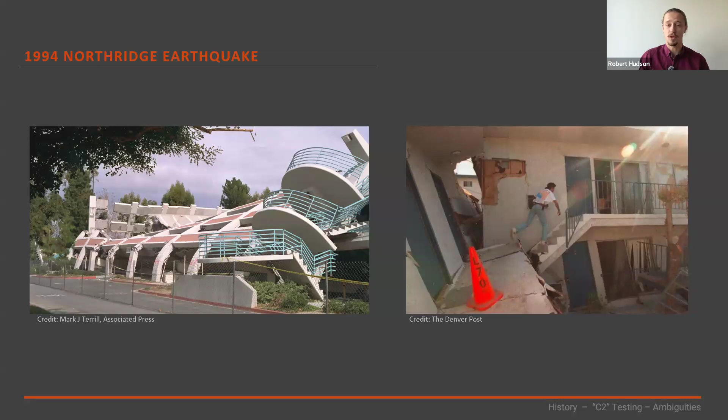So much so that the US actually banned post-installed anchors completely in seismic applications for the best part of 2 years. And this is kind of a timeline of what we have seen since then.

The industry, especially in the US, primarily led this effort, but there was a bit of an effort to put together a method for seismically rating post-installed anchors in concrete, basically looking at how concrete behaves, which is the cracking mechanisms of concrete, and the seismic actions we expect and allow for on anchors in a seismic event. The first codified method for this didn't actually get implemented until 2001, and this was done through the US Concrete Code, specifically ACI 355.

Interestingly, they didn't invent this method. The Canadian nuclear industry had actually already been using it for post-installed anchors in their nuclear facilities, which they deemed at the time, probably quite responsibly, that they should have a higher level of redundancy for post-installed anchors in these contexts. And so that was adopted into the American Concrete Code.

Then in 2013, the Europeans came to the party and developed what most of us in New Zealand are most familiar with, which is kind of the C1 and C2 tiered rating system for post-installed anchors.

A quick note on the code terminology. In 2016, the Europeans did slightly restructure how they publish their codes. And so while we're often familiar with the reference to ETAG 001 Annex E, this actually isn't quite the right reference anymore. They just kind of restructured how they do their codes. The content didn't meaningfully change.

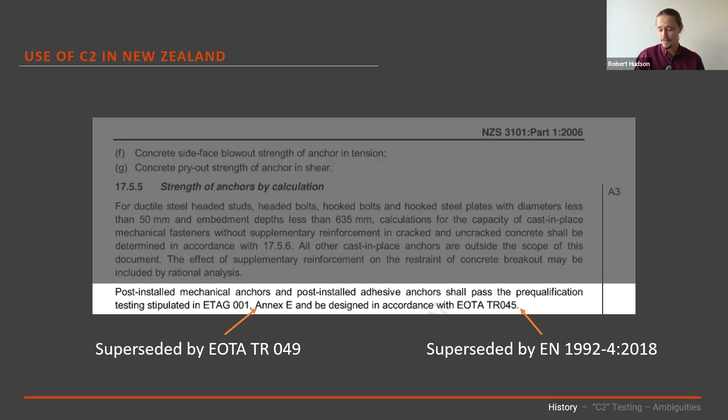The importance classes in the Eurocode do align pretty well with what we have in 1170 in New Zealand, and so for the most part, you can just take them as a direct comparison. The seismicity does take a little bit of effort to compare them properly. There was a paper a couple of years ago, or maybe more recently, that was published doing an example calculation.

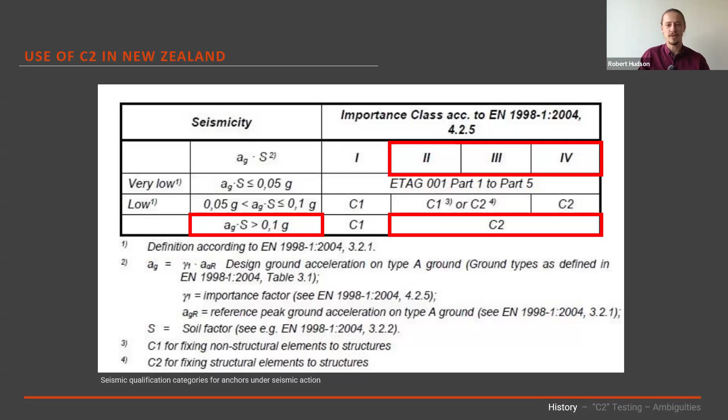It does give you slightly different results if you compare it directly to 1170. But as a general rule, for the vast majority of what we're doing in New Zealand, we have a seismicity greater than 0.1G. And unless you're dealing with an importance level 1 building, or a shed at the very top of the North Island, you're almost certainly going to be required, following our code, to be using C2 capacities. That's the situation we're in, and why this is front of mind for so many engineers in New Zealand.

So that's a little bit about how we got to where we got to. The next section, I'm going to dive into the testing that we do, or any supplier does, to actually provide a C2 capacity, and some of the background as to why the testing is the way it is. I'm not going into this so you can go away and do the testing yourself. The intent is I'm concentrating on things relevant to be aware of when designing such anchors, so you can make appropriate considerations where relevant.

Taking a step back for a second, there are two things we really care about with anchors in seismic scenarios in concrete. We care about the actions on the anchor - the cyclic tension and cyclic shear behavior. And there's also the behavior of the concrete, more explicitly, the cracking behavior of the concrete. Quite intuitively, if we start having cracks in our concrete and our anchors are in those cracks, that's going to impact the performance of any post-installed anchor. Take the extreme case where your crack becomes wider than your anchor, it's going to fall out of the hole. Thankfully we don't often have that scenario, but it's a spectrum.

And the larger the crack, the more impact we have. But there is this baseline assumption when we talk about this, that when cracking occurs in concrete, that crack will occur where that anchor is. And this wasn't just good judgment - this was actually based on a research program done in California in the 2000s.

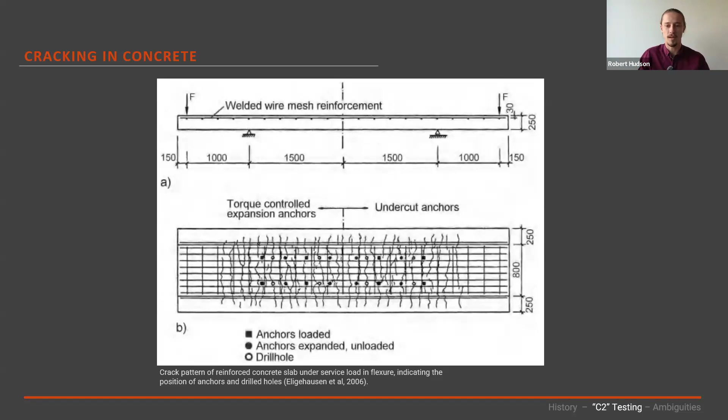The other thing we care about with regards to cracking is the size. The larger it is, the more adverse impact it's going to have on our post-installed anchor connections. Now there are two numbers to be aware of, and I suspect you'll all be sick of me saying these by the end of the webinar - there's a 0.5 mil crack width and a 0.8 mil crack width. The 0.5 mil crack width is very roughly intended to represent service conditions and moderate seismic events, and this is the crack width that a C1 capacity is allowing for. Then we have the slightly larger one, 0.8 mil crack width, and this is what a C2 capacity is allowing for.

That 0.8 mil crack width is intended to represent basically the scenario where you have a reinforced concrete beam. If you come just outside of the plastic hinge zone, and then load that minimally reinforced concrete beam to the point where you just start getting yielding in the tension reinforcement, the 0.8 mils is a prediction of the crack width at that point in that scenario.

So when you're just getting yielding of your reinforcing in your concrete beams, that's what it's trying to represent, and that's what we use in a C2 test.

Quick note, as everyone should be aware, there is really no test program or way to rate post-installed anchors in plastic hinge zones. The damage and cracking we expect in a plastic hinge zone in a seismic event is pretty dramatic, and nobody's providing you a capacity for that. As a general rule, if you want an anchor to perform in a seismic event, you probably just shouldn't be using post-installed anchors in plastic hinge zones.

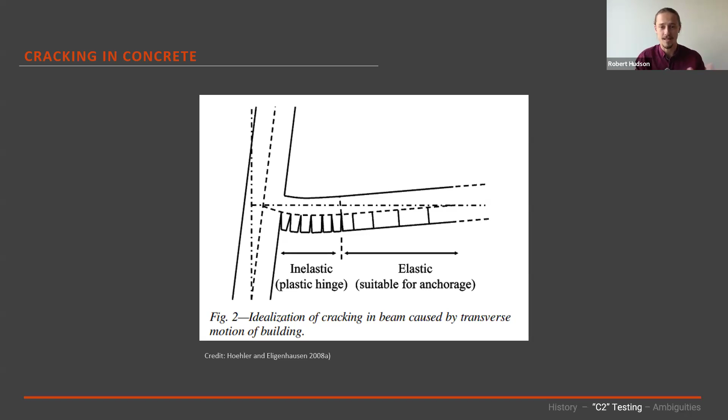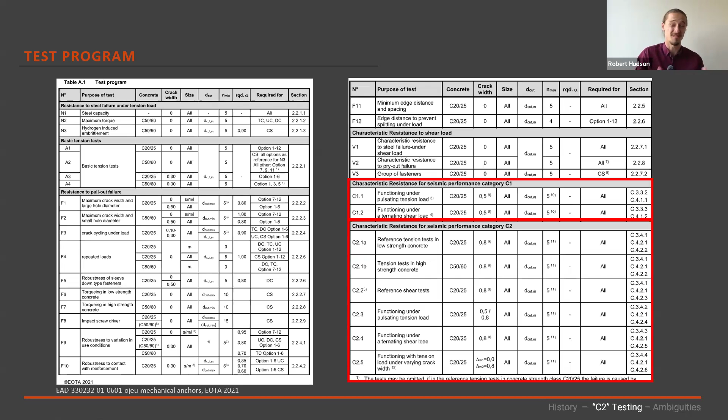The next one is cyclic tension in the anchor. This is also quite intuitive - if you've connected strongbacks or some such connection, you're going to get cyclic tension behavior in that anchor. These are the two mechanisms that a C1 capacity is allowing for. So when we do C1 testing, we're allowing for these two mechanisms, and we're allowing for crack widths up to 0.5 mils.

What a C2 capacity additionally allows for is this last mechanism, which is cyclic crack behavior in the concrete. There's a number of scenarios where this occurs, but the clearest one is if we think about a reinforced concrete moment frame and that beam. If we put that frame into a seismic event, we're going to get moment reversal in the reinforced concrete beam, which means our cracks are both going to open and close. Because we have this baseline assumption that our anchor is in the crack, these cracks are going to open and close around our anchors, and this obviously has an impact on how the anchor behaves.

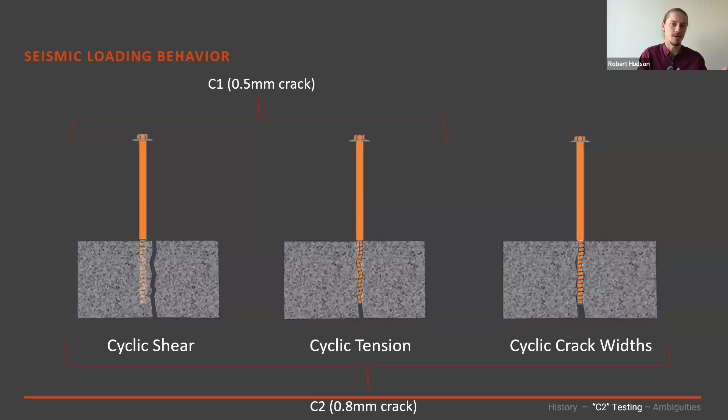I apologize to anyone who's run this testing, because I'm going to oversimplify this a little bit. The test procedure is the most complex post-installed anchor test procedure I am aware of. But it basically boils down, when you're trying to calculate a C2 tension capacity, basically boils down to this formula, oversimplistically, but basically it does.

What we have on the left there is the C2 tension capacity. We have these two reduction factors, alpha and beta, and then we have this baseline capacity that we start with. For the tension capacity, we're going to go through where each of these values come from. Our baseline is just the monotonic tension capacity of an anchor in a crack. It's actually using the 0.5 mil crack, which is that moderate seismicity, serviceability kind of baseline performance of an anchor in a crack.

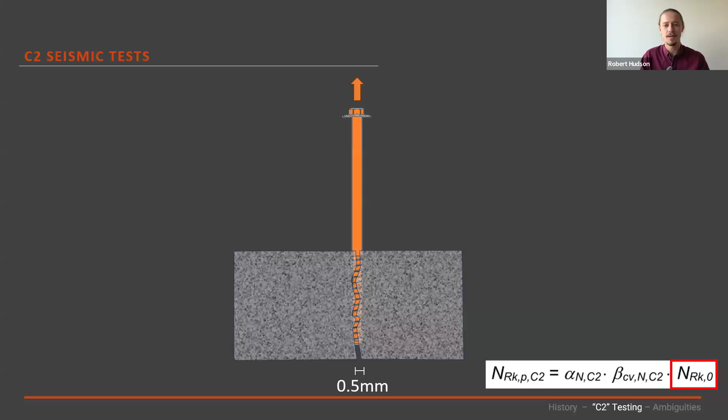And then we have this alpha and beta reduction factor that we apply. The alpha factor is trying to represent the loss in load carrying capacity from each of the mechanisms that I showed before: your cyclic tension loading on the anchor, the additional wide 0.8 mil crack width, and the cyclic crack behavior around the anchor. The formula for C1, by the way, is exactly the same. It's just accounting for fewer mechanisms.

So we have a couple of tests we do. We have this monotonic test in the slightly larger crack width that's investigating what the additional crack width impact is. And then we do a cyclic tension test on the anchor in a crack, and we have the cyclic crack test. Now one thing to highlight here is that we don't actually superimpose the impact of the cyclic tension test and cyclic crack test. This is quite good, because otherwise the capacities would be even lower.

This was based on a really nice piece of research done, again around the same time, in California—all of this really comes out of there, or the University of Stuttgart. What they did is they built a reinforced concrete frame, put a simulated non-structural element underneath the reinforced concrete beam, put it through thousands of cycles, and measured across time the tension in the anchors and the crack widths. Basically what they found is that the maximum of each don't occur at the same time. So when we're generating these capacities, when we talk about tension, we actually just account for whichever one has the most adverse impact.

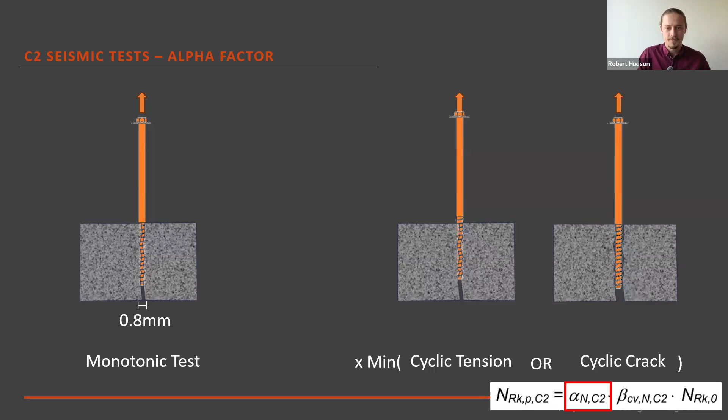Now in terms of what these tests actually look like, the one on the left is that cyclic tension test, where we're just loading the anchor cyclically. That dotted line is crack width. We start at a smaller crack width, a lower cyclic load, and then we increase the crack width to that full 0.8 mils, and bring the load all the way up. That graph kind of reverses when we look at the cyclic crack test. We basically have constant tension load, which increases throughout the test, and then we cyclically open and close that crack around the anchor. You start with really small widths and work your way all the way up to multiple cycles of a 0.8 mil wide crack.

There we go, I got some arrows.

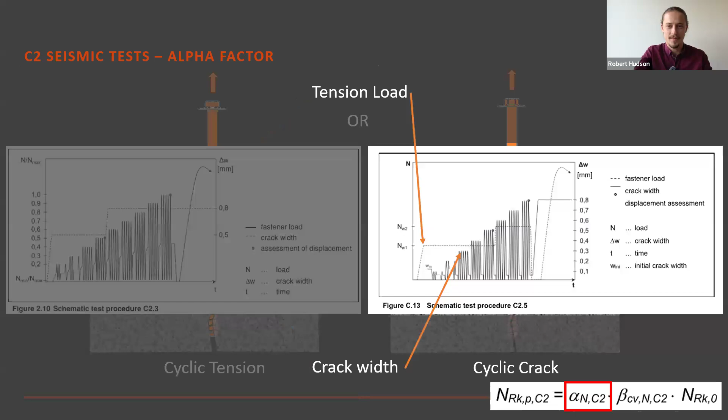Now to give you a sense of scale of the impacts of these two tests—this will vary quite significantly depending on the type of anchor you're using, some anchors are quite resilient to these mechanisms, others are less resilient—it would not be unusual to expect a reduction factor from the cyclic tension test in the range of about 0.9, so maybe a 10% reduction in capacity. And the reduction factors I might expect if testing an anchor through the cyclic crack test would be in the range of 0.2 to 0.3, which is a 70 to 80% reduction in anchor capacity.

Overwhelmingly, the reason our C2 capacities are so much lower than what we used to use is because of the cyclic crack test. This is the test that C1 doesn't take into account, which is why C1 capacities are significantly higher.

Now when we were doing this testing, we started playing around in our own lab with some of the variables. We wanted to understand the sensitivity of these variables, because you'd get some test programs where your variable is set as a number and you could increase or decrease it and it's not that sensitive, doesn't really have a big impact on the outcome. So we wanted to understand how sensitive these variables were to the end result. We played around with it a little bit, and the conclusion was they're incredibly sensitive. The two variables we care about here are the crack width, that 0.8 mils, and the number of cycles that we're putting the crack cycle test through.

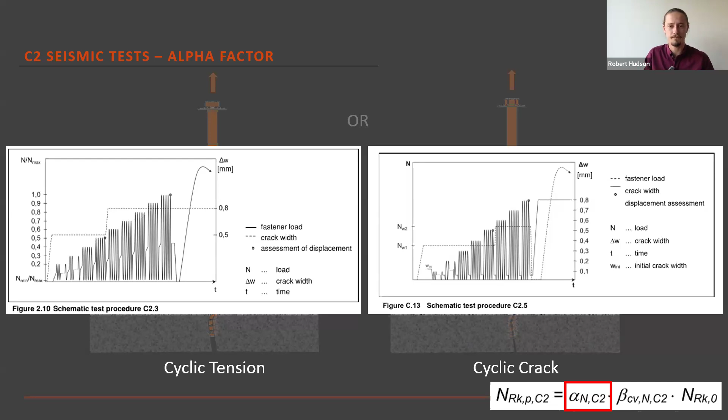And especially, it's really this test. Just quickly on the beta factor, what this is doing is accounting for displacement performance of anchors. It doesn't, in my experience, really have a big impact on the end result in terms of the capacity. Might have a little bit, but not a big reduction. But what it does do is it has pass-fail requirements.

So it's making sure the two things it cares about basically is the spread of displacements across multiple tests. What you're protecting against there is unpredictable displacement performance of anchors, which is not something we want. It also has a maximum displacement of 7 mils in the test. So if you have any anchor that is displacing unreasonably far in these test programs, it basically just doesn't allow it to get a C2 capacity.

And these are pretty reasonable things. We don't want anchors to displace a huge amount when we're using them. We're not accounting for that in design. But the actual impact on the end result is reasonably minimal. It's more of a pass-fail kind of thing with regards to displacement performance.

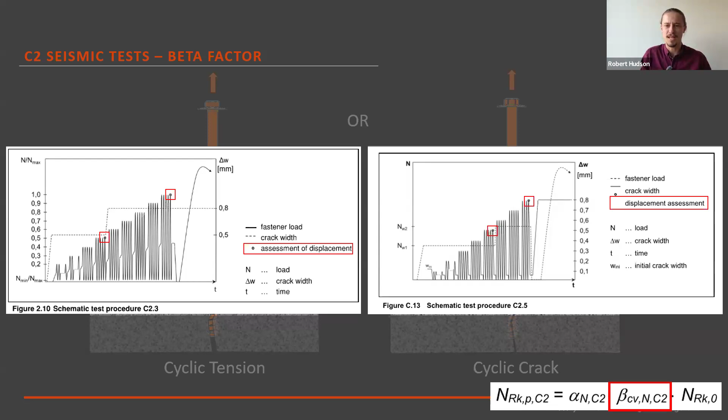Basically, when it's all said and done, that's where this C2 capacity comes from. There's a couple of vocabulary things that might be worth noting. You'll see in supplier documentation, or especially any European company that sells products in New Zealand, they'll be using the European language. We often call things capacities. The language you'll see published in documents from Europe will be resistance. Synonymous, really the same thing.

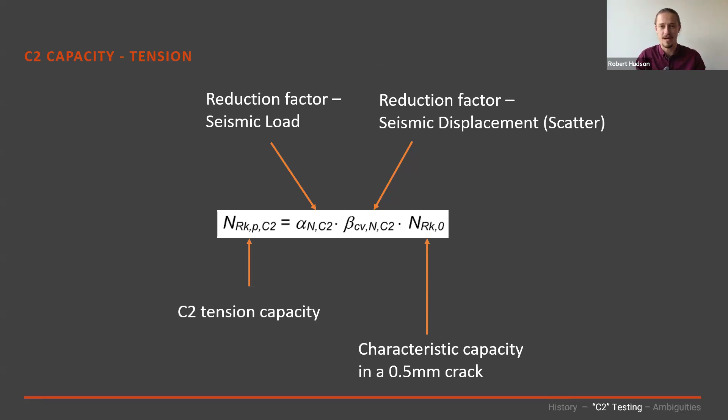The reduction factor, the strength reduction factor that gets applied in Europe is called a partial factor, and it's represented by a gamma. It varies depending on a couple of aspects, but often suppliers have already applied it. And if that's already applied, you wouldn't then go and apply the New Zealand strength reduction factors on top of that. They try to achieve the same thing effectively.

All right, that is basically where tension capacities come from, C2 capacities. Obviously, you do a similar sort of thing for shear. I'm not going to go into this in the same sort of detail, but it is exactly the same philosophy. You start with your base shear capacity, you have reduction factors, your alpha and beta reduction factors based on the impact of the different mechanisms.

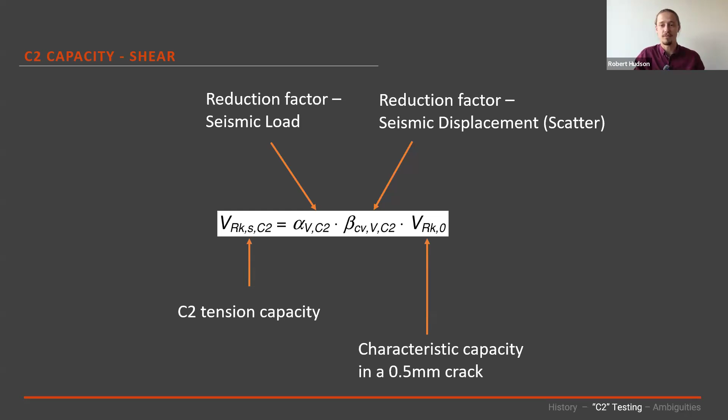Now, one thing that is interesting with shear capacities is we don't run that cyclic crack test. This is because someone did a really nifty study, which has probably saved hundreds of thousands, if not millions of dollars worldwide in anchor testing, that basically compared the impact of the cyclic shear test and the impact of the cyclic crack test on the shear performance of post-installed anchors, and basically found that the cyclic shear test was reliably more adverse. So we're able to exclude one of these tests from the shear testing.

Which means that the mechanisms that C1 and C2 are allowing for are actually the same. With regards to shear capacities, the main difference is just that we're allowing for a larger crack width. And that does have a negative impact on anchor performance, obviously, but that really is the main difference between the two.

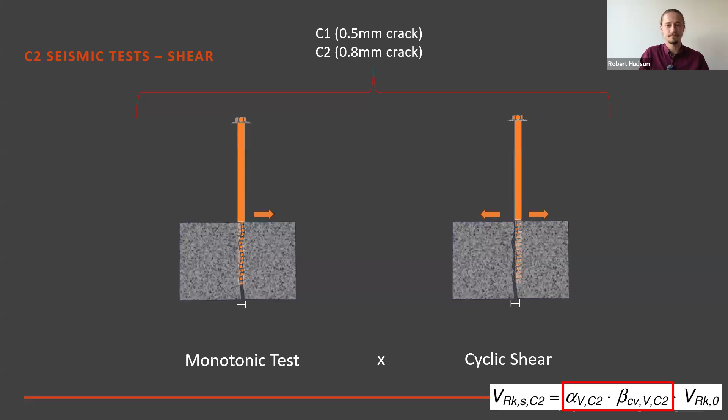And then that's actually the test you run for cyclic shear. You're bringing your anchor into negative and positive shear in both directions. Quite often, for some anchors, you start getting steel failure governing, especially if you're deep embedment, which is a really positive failure mechanism with regards to anchor performance, rather than pry out or anything like that. In general, even when you start putting seismic things into anchors, shear performance is a pretty reliable mechanism, because at the end of the day, you've got a piece of steel in a substrate.

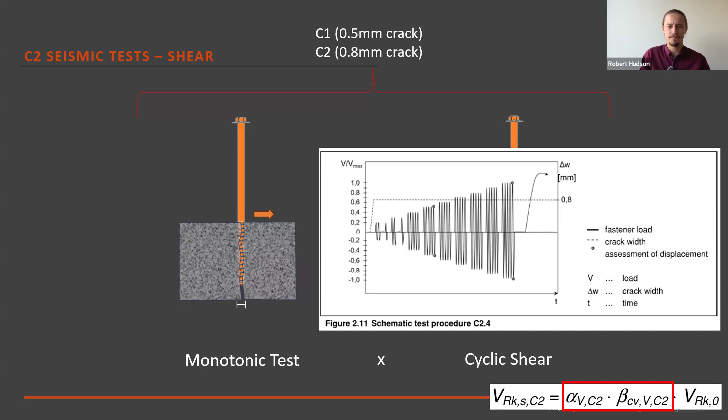Okay. That is, broadly speaking, where we are getting these capacities.

Now, this next section, I'm basically wanting to highlight a couple of things that I think designers should be aware of and thinking about when you're doing these sorts of designs with these values. A bit of a caveat here: it's really easy to pick apart other people's work, and putting together these kind of test procedures would just be a monumental effort. The amount of research required, and even just the code development process, is a huge amount of work. But it still is useful for us to highlight where it doesn't fit what we do quite perfectly, so that designers like yourselves can understand what's going on and accommodate this a little bit better in design. So this is some of the ambiguities around these test procedures.

Okay, the first one, crack widths. I showed this image before when talking about where the crack widths came from. If anyone wants lots of bedtime reading, you can go Google the Unified Crack Protocols, which is where all this comes from.

We have those two crack widths we care about for C1 and C2 capacities: the 0.5 mil crack width and the 0.8 mil crack width. Now, I have not been able to find any published justification for the 0.5 mil crack width. I've talked to many knowledgeable people, I've looked myself, and for love nor money, we cannot understand where this 0.5 mil crack width comes from. That's not to say it's wrong or misrepresentative, but nobody I know can really justify why we're using 0.5 mils rather than 0.6 or 0.4. It's possible it was just a judgment call based on experience. Not sure, don't really know where it comes from.

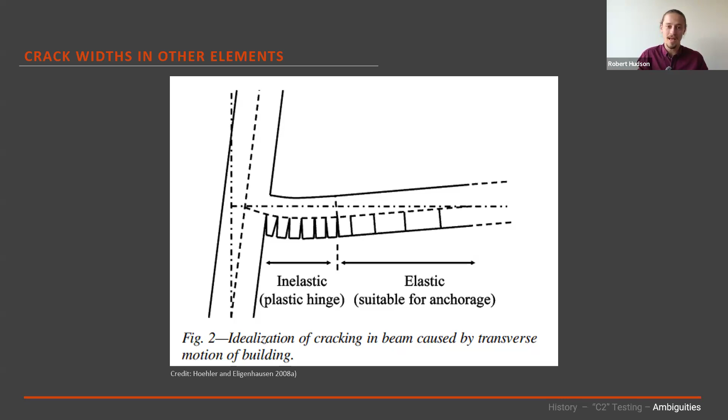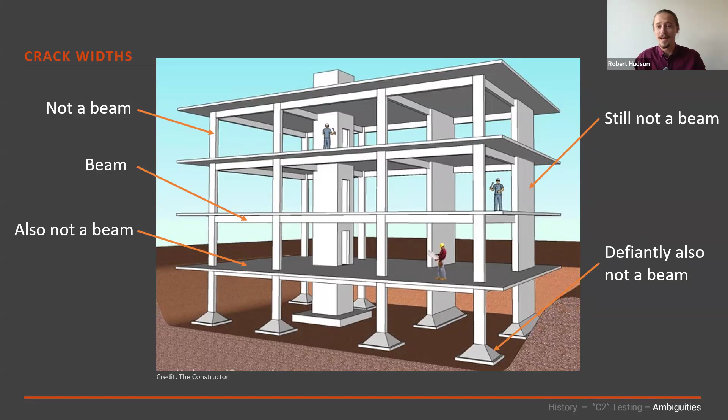The other aspect is that there's a lot more than beams that we deal with. So I'll take everyone back to first year engineering school, where we have a building structure and can look at the different elements. We have beams - excellent, beams are good, very important. We also have not beams. That's not a beam. That is also not a beam. Still not a beam. Definitely also not a beam. I'm being a little facetious, but I hope the point comes across.

This 0.8 mil crack width apparently has been developed for reinforced concrete beams. It's not immediately obvious to me that it translates perfectly well to other elements in a reinforced concrete structure. Maybe it does. Not sure.

From a design point of view, the important thing to keep in mind is that if you're using a C2 capacity, what you're actually allowing for is a crack width up to 0.8 mils. If you're expecting cracks larger than that, the C2 capacity is probably not very appropriate - it's probably overrating the capacity. Similarly, if you're expecting cracks less than that, your capacity is going to be quite conservative.

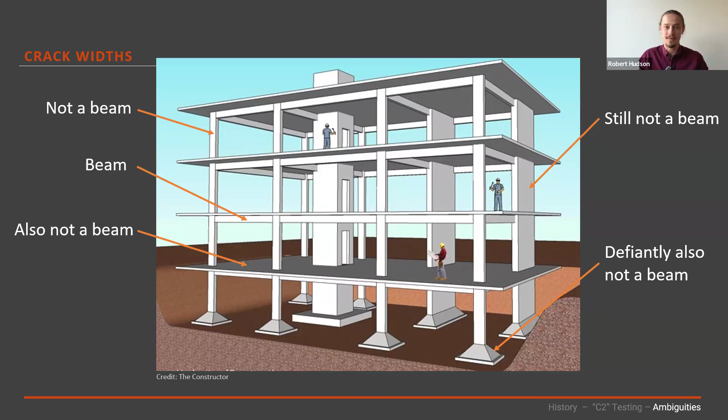One of the reasons we started playing around in the lab, trying to figure out how sensitive things like crack widths were to the end result, is because we wanted to understand how much this matters. And it's really sensitive - the outcome really depends on what your crack width is. So it's a really important thing as a designer to be aware of, that when you use these values, that is what you're allowing for, and that's what's been tested - that's the testing behind the value you're using.

So the other parameter that I mentioned in that really critical crack cycling test that has a really big impact on the end result is the number of cycles we do at the largest crack width. So basically the number of 0.8 mil wide crack width cycles that we run has a really big impact on the end result. You can kind of imagine this, right? If you're opening and closing a crack around an anchor, you're going to be crushing all the concrete around the anchor, turning things to debris. You do that enough times and your anchor is not going to be able to hold on to anything. There's going to be nothing left for it to hold on to.

Now, when you start digging into where the number of cycles and things like this come from, I've mentioned a lot now that all this testing kind of comes out of California, in the 2000s. Which in and of itself isn't a problem, but when they started looking at developing these crack protocols, they very rationally used their local seismicity. So these were all developed based on a 90th percentile 475-year return period earthquake in LA, which equates to a 10% probability of exceedance in 50 years.

That's all well and good, except there is no way for you to scale this when you're doing the testing to any other return period of earthquake. And there's definitely no way that I'm aware of, at least in design, for a designer to scale that for a longer design life or a shorter design life structure.

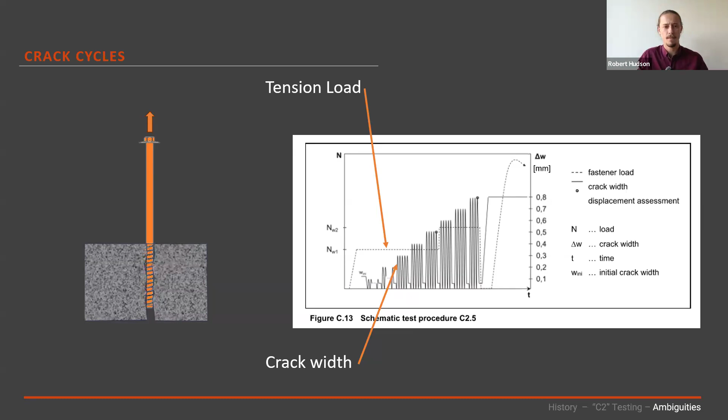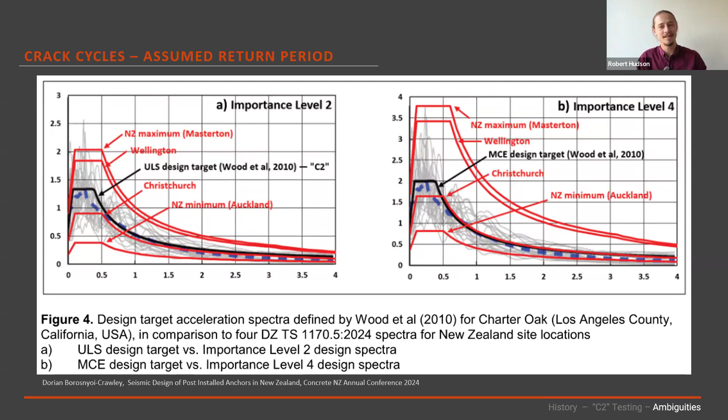And just to kind of re-emphasize that point, this was put together by a guy called Dorian, at the WSP research concrete research lab down in Wellington. He's written a few papers on this in the last couple of years, if you really want to dive into some of the weeds on this. He's gone here and compared the ULS design target and the maximum considered earthquake, which is part of the US codes, to kind of importance level 2 and importance level 4 response spectrums across New Zealand. And you can see that obviously it's a range, right? It's not all one level of response spectrum. So that's kind of just something that's built into how we're testing these anchors and what we're doing in design.

So say we have a scenario, and obviously there's many different scenarios in which this would come up, but I'm just using this as an example. Let's say we have a reinforced concrete frame building. We go in and we retrofit this for whatever reason, say we want to bring the drifts down. We put in a big steel brace frame, designed to be much stiffer than our existing concrete frame, so we're not really expecting the concrete to displace to the point where you're getting yielding in the reinforcing. We're expecting most of the lateral load to be carried by the steel. In this scenario, at what point are we getting 0.8 mil cracks, which are associated with the yielding of our reinforcing in our reinforced concrete structure?

The reality is we're probably not within the scenarios that we're designing for. And this isn't necessarily a problem so much - it's conservative, put in some more anchors, not the end of the world in this scenario. But it's quite good to be aware that if you've got smaller crack widths, that magic 0.8 mil number, you've got some conservatism in your anchors. Put them up to 100% utilization, you can sleep very well at night. So just understanding where you sit in terms of how much conservatism is there, I think is quite beneficial from a design point of view.

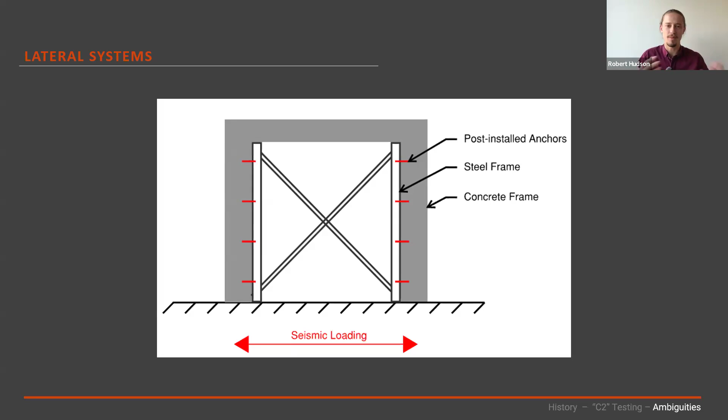The next one that's also pretty clear cut.

All of this, everything around C2 and C1 capacities, really everything in this space is understandably focused on reinforced concrete. If you think back to that image I showed, which was the basis for the fundamental assumption that we design anchors for, cracking in concrete happens where the anchor is. That's really important in reinforced concrete - we have to get cracking for it to behave as designed. You need that reinforcing to be engaged.

Things like pre-stressed concrete are an entirely different mechanism. For pre-stressed concrete, you're relying on compression from the pre-stressed strands, or if you post-tension a reinforced concrete section, this might be the same - you're relying on compression across the cross-section to resist those loads. You're not relying on cracking to enable engagement of reinforcing and yielding of steel. Because we don't expect the same kind of cracking behavior, C2 or C1 capacities perhaps don't represent the scenario very well, and where crack widths are less than what's used in testing, the capacities we use are going to be very conservative.

So if you're putting stuff into pre-stressed beams for a connection, and because 3101 tells you to use a C2 capacity, if you're a little bit handcuffed by that - which in most scenarios in New Zealand you kind of are at the moment - at the very least, know that you have a lot of redundancy in that anchor, and you can put that up to a really high utilization, and it won't be an issue.

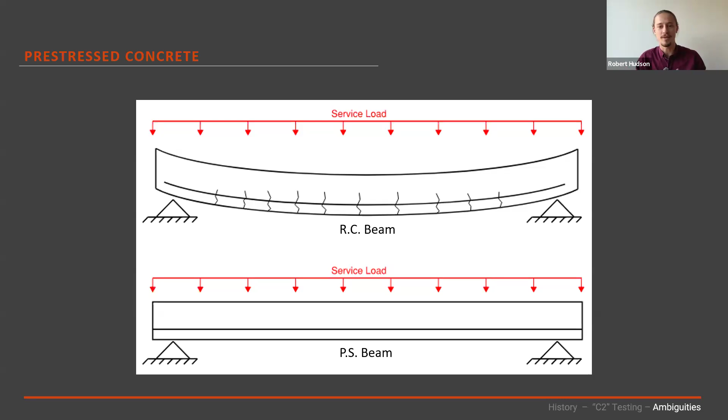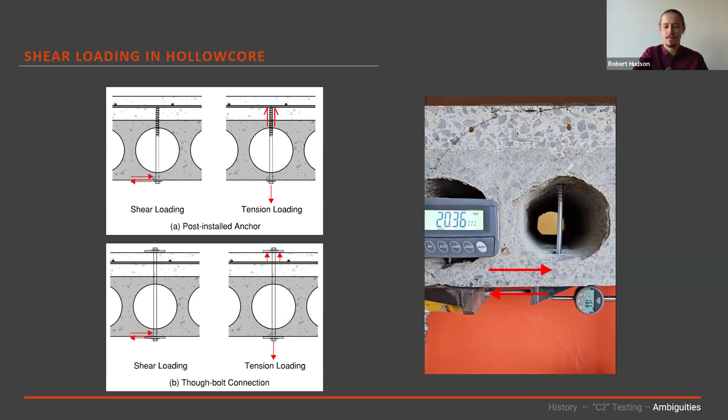A little bit on codes and standards. Most countries, definitely New Zealand, and I think probably all major countries, their codes and standards are built in a hierarchy. We have our building act, the building code, then our standards, and the standards are in a hierarchy too. We have our loading standards, our material standards, and our specific design application standards.

Because they're in a hierarchy, whenever there's a disagreement between any codes, whichever code is above the other in the hierarchy takes precedence. And there is a little bit of confusion I've come across in some of the specific design codes that we have in New Zealand.

That's not a comment on anything other than technical code compliance. So if you're doing a verification method, technically that's the way our codes are structured.

One other one I do want to highlight, a more recent one. This got published through BRANZ, but it's ER95's Code of Practice for Seismic Performance of Non-Structural Elements. I've not been involved in this at all, my knowledge comes from just reading it. So if you are doing design of non-structural elements, I suggest you go read this for yourself.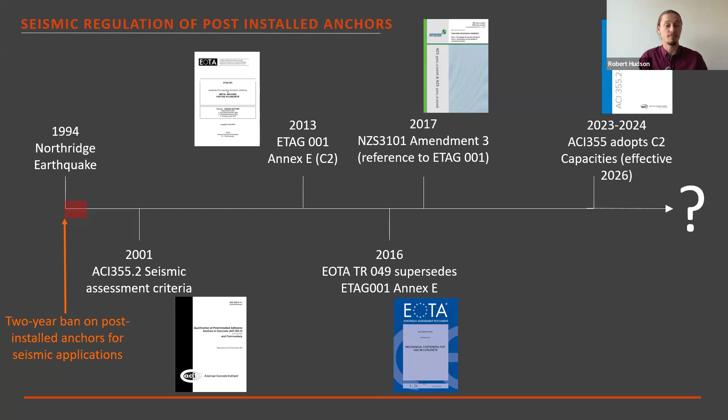So I'll leave you with a final comment that I think is important for us to keep in mind. It is the case that many of the individuals who know the most about anchors know this because they work with anchors, but everything that gets published in the industry really should be angled towards giving designers what they need to, A, understand what they're using, and B, giving them the information they need to achieve the design intent. It's really important that when we're building assessment criteria, that they exist to support the designer in that goal, rather than helping suppliers differentiate products. So I think it is something we just have to keep in front of mind, and see it as the role of industry organizations like Engineering New Zealand, SESOC, NZSEE to promote this on behalf of designers.